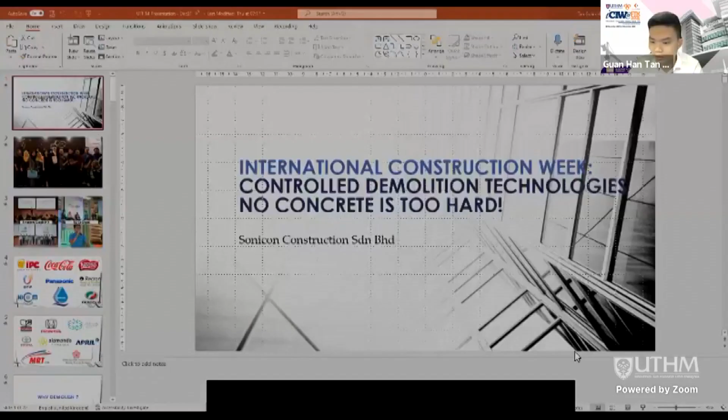Okay, mainly, this week we have International Construction Week, and my topic today will be controlled demolition technologies.

Okay, just a very quick introduction on who is Sonicon. So basically, Sonicon is actually doing concrete cutting, controlled demolition, robotic demolition. Basically, if I were to categorize in 2 words, it's basically controlled demolition.

Okay, so this is our company. We received an award 2 years ago, E50 by Deloitte and SME Corp.

And these are some of the events that we were invited to previously, to Google in Singapore, to KL Go Digital, and many more events. These are some of the projects that we have participated in before: IPC, Coca-Cola, Nestle, Perodua, UMW, HICOM, Honda. We even went to Indonesia, April Group, to do some work over there during their factory upgrade.

Okay, now let's come to the most important question in the topic. Why do we need to demolish in the first place? Takkan suka-suka just robokan saja, betul tak? Okay, so why demolish in the first place?

Picasso said this: every act of creation is first an act of destruction. So basically, to construct something, a lot of times you need to destruct something first, then only you can start building something.

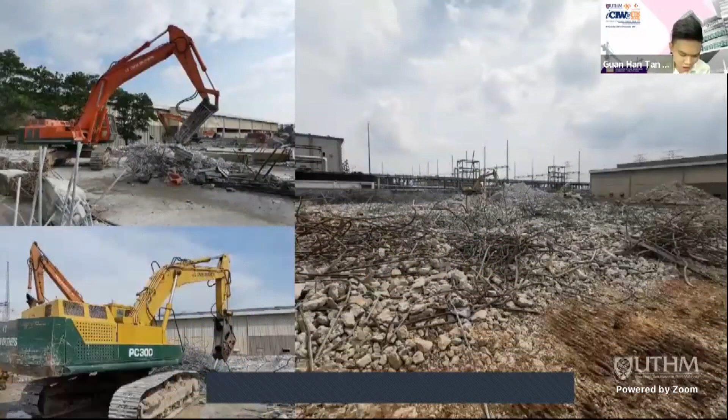So today my approach is a bit different. I'm going to share more about some of the cases or some of the jobs that we have done, to help you understand when all this demolition comes in, and also what kind of technology to use in different kinds of situations.

So this is one example of total demolition. We use big equipment, big excavators, high reach excavators, and we demolish the whole area. So this is actually one of the jobs that we did within the factory for power plant construction.

Okay, now I'm going to talk about controlled demolition, and I'm going to start out with non-vibration controlled demolition method. Okay, let's talk about the first case study.

This is IPC shopping mall. IPC shopping mall is basically next to IKEA, in Damansara, KL. Beside IKEA, there's a shopping mall called IPC. So IKEA and IPC are actually under the same group. In 2017, they wanted to upgrade the shopping mall, but the shopping mall still needed to operate other businesses.

So they cannot close the whole shopping mall just to cater for the renovation. So what they do, they have to shut down a portion, and the other tenants are running on 2 levels. This means our demolition method has to be quiet enough so that their business will be less disrupted. I won't say totally won't be disrupted, because it's impossible.

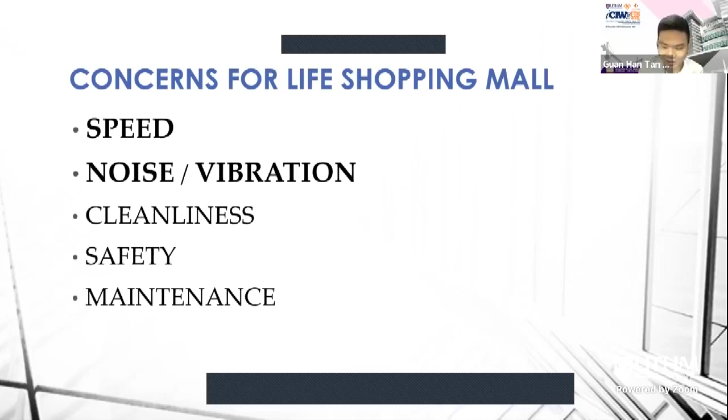So I talked about one of the things, we actually did quite a lot of things in Ikano. I'm just going to pick one of them to help you understand. Now they want to change the internal structure of the whole building. They want to install an escalator on a few levels, which means the previous escalator they will take out, and then install it in new areas. So let's say they want to install new escalators at this particular area.

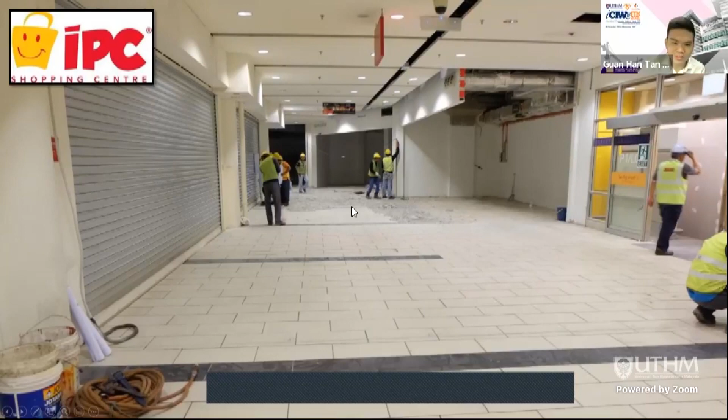Means I need to remove this slab. Okay, I need to remove this slab. So I want you to remember these 2 columns first, so that we have a reference later.

So when we start doing the cutting, only then we realize this is a 600 mm thick concrete, which is 2 feet thick. Most of the time in your studies, when you talk about slabs and all that, you're looking at maybe a normal slab, around 150 mm thick to 200 mm thick, 2 layers of reinforcement. But this one that we are cutting is 600 mm thick, which is 3 to 4 times more than the usual standard.

This is a precast panel. Again, this is a shopping mall, we are not allowed to hack, we are not allowed to make so much noise. So what do we do? We use diamond wire cutting technology.

You can see this whole thing is during the process of cutting. When we cut, we basically cut it 1 piece by 1 piece, like cutting tofu. One piece, square, take it out. Cut one piece, square, take it out. So it keeps cutting and taking out 1 piece by 1 piece. This actually makes the whole thing more efficient because I don't need to handle so much debris. Internally it's difficult for me to move in any bobcat or use labor to remove the debris, so I can move all these things piece by piece going out.

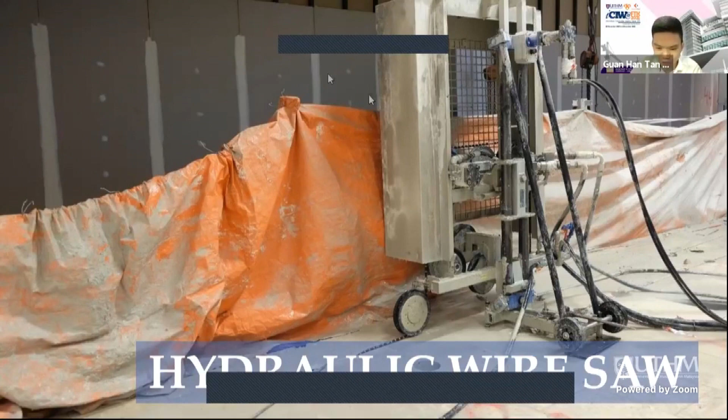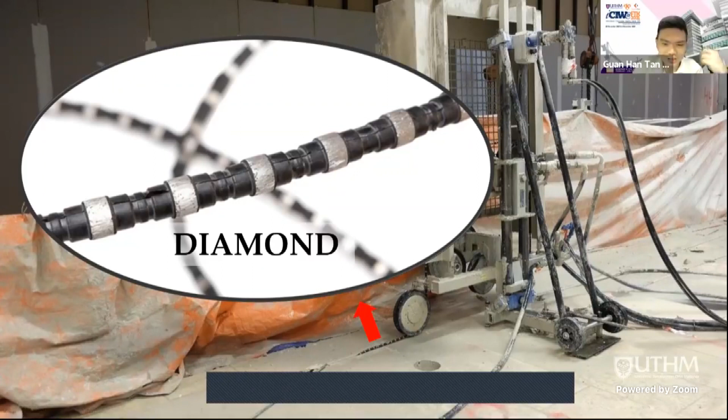This is how the hydraulic wire saw looks like. Look at this wire, we call this a diamond wire. In other words, all these cutting tools that we use, sometimes you hear people use diamond cutting tools to cut concrete. Why use diamond? Because diamond is the hardest material in the world.

If you go by the Mohs scale, this is grade 10. Concrete is around 3 to 7, asphalt is around 2 or 3. So diamond is much harder. So if you want to cut concrete, you want to cut rebar, it's not a big issue. So we're going to use diamond to do the cutting, imagine basically circling around the concrete and doing the cutting.

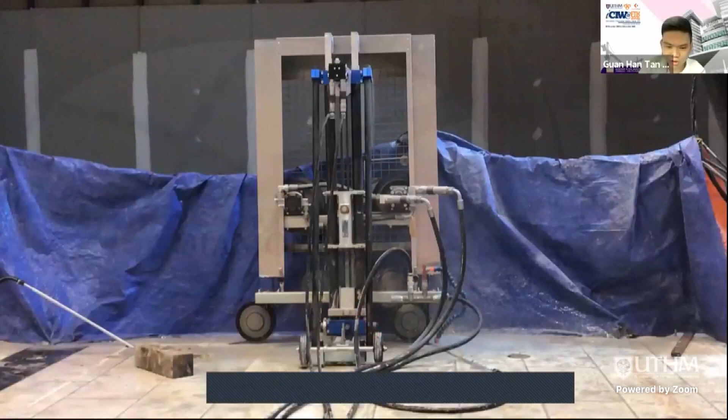Let me show you a short video regarding this.

Meaning, Mr. Tan, diamond cutting is the silent one. Yeah, this is actually more silent. Correct, in terms of noise decibel level, I think this is less than 90 decibels. Just to have an idea, us talking is around 70 decibels, 60 to 70 decibels. Cutting a tree using a chainsaw, when you pull it, it's like that. The one we're looking at is around 100 decibels, 90 to 100 decibels. So you have an idea what kind of noise range we are looking at. Among so many cutting methods, diamond wire is actually the quietest.

Alright, so you can see this is the 'tofu' piece that we take out, one piece at a time, and then we ship it out, move it here, ready to be cleared away. So you remember the 2 columns that I talked about? This is the 2 columns, and the whole area here, we cut and remove piece by piece.

The above level was also done by us, for the same purpose. They're going to build an escalator after that.

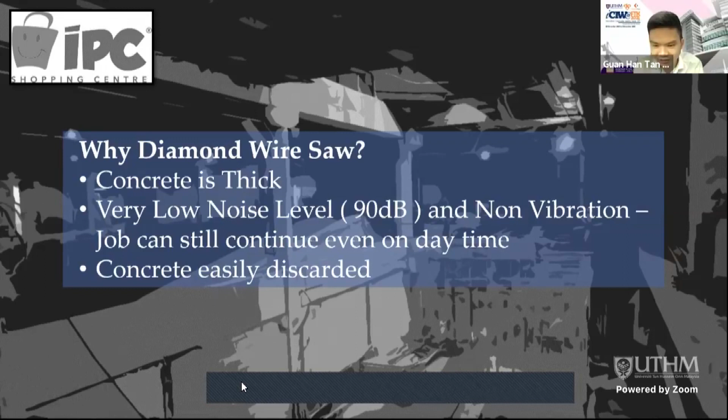So this is the first case of the shopping mall. This is before, this is after. You can see the difference.

Now we move to case 2, industrial factory upgrade. We do a lot of this type of job when it comes to factories. Just now we talked about shopping mall, commercial. Now we talk about industrial factory. What do they want to do?

They want to install new machines, new equipment, but they realize the slab was previously not designed to install new machines, because the machine load is too heavy, too heavy. So if they install the new machine without upgrading the structure or foundation, the whole slab is going to crack in the future.

So we have to remove the slab, but they have another concern, because their other production line is still running. This is actually an airplane parts manufacturing factory in Penang, and their production line is still running.

So we cannot allow too much vibration, because if we hack away the slab and the whole place is shaking, their production line with their calibration gun would all run away. So vibration is their biggest concern. That's number one. Of course, we also consider cleanliness, speed, safety, and maintenance.

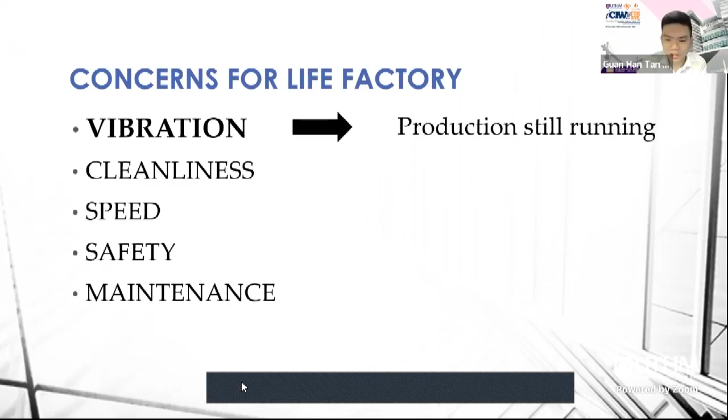Let me show you how the cutting looks like. This is a floor saw machine, a floor cutting machine, around 1 ton in weight. And here you can see this is the diamond blade.

Let me show you the video. You can see it's actually the same concept as before. We cut piece by piece, and then lift up piece by piece as well. For this slab, we were cutting at 400mm depth.

You can see that using diamond cutting with the right equipment, the effort can be quite effortless. Now I want you to notice something - once we do the cut, you can see the slab starts sinking down. See that? It's sinking because it's already cut through, so it sinks down to the soil and sits on it.

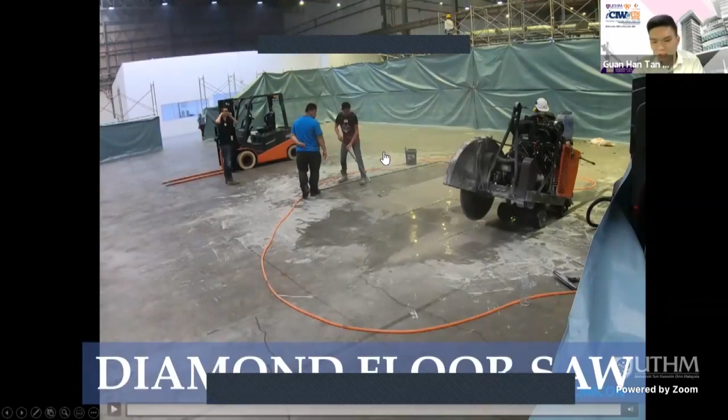After we cut all these pieces, we use a forklift to lift the stone out, lift the stone out, lift the stone out. So this is the diamond floor saw.

When we were doing this job, the owner of the factory was practically standing right beside our cutting area. He wanted to feel what kind of vibration we have when doing this job. Needless to say, when we finished the whole job, the vibration was minimal, even close to zero. There was no vibration - it didn't affect their factory or their production line.

Now this is the infrastructure work. Just now we covered commercial, then factory. Both of the previous jobs we mentioned were more of an upgrading job.

Do you remember the 3 reasons we talked about? One is refurbishment, one is upgrading, and the third one is rectification. I'm sorry, let me get that right - so now we talk about rectification.

Rectification means something screwed up, something went wrong. A mistake was already made, no choice - they have to rectify it. They need to repair the issue.

This one, I feel, may be our most challenging job over my years of experience in this line. Look at this thing - this is the support for a highway that is going to be built. Look at the top here - you can see it looks like it's already bent.

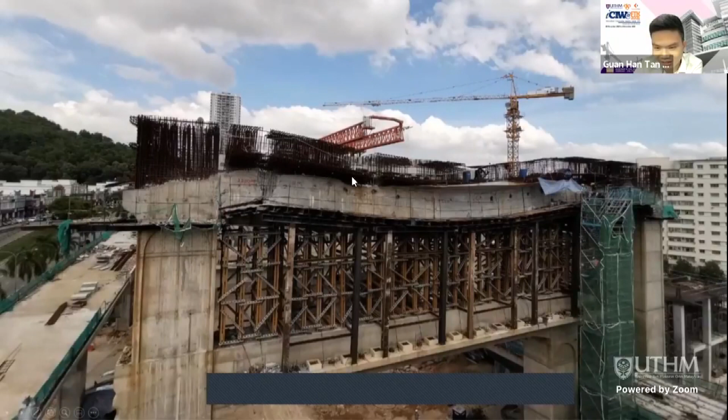So this is from the top view, you can see this thing starts sinking down. Can you see, doctor? Yes, oh yeah, it actually sinks down already.

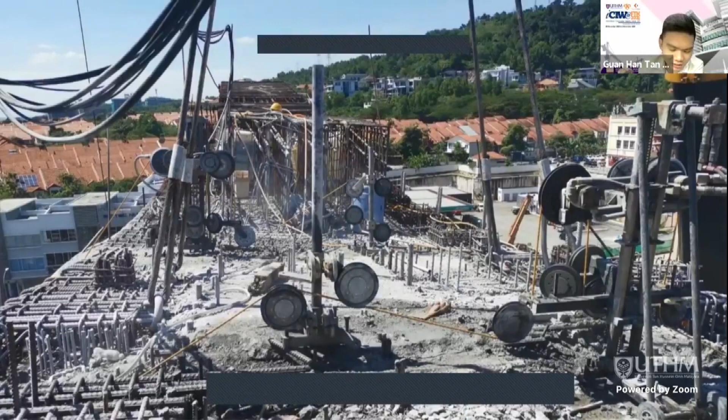So we use the same method again, diamond wire, same as what we showed as the first one. When we were cutting this, the width is 2.5 meters, the height is also 2.5 meters. In other words, we are cutting a 2.5 meter depth, even taller than all of us here.

The good thing about using diamond wire is that we are not limited to any kind of thickness or size, so we can practically cut as big as possible. But when it comes to cutting or removing, one of the biggest concerns is how we are going to throw away the concrete. A lot of times the cutting part is the easy part. To dispose of that concrete, that is the challenging part.

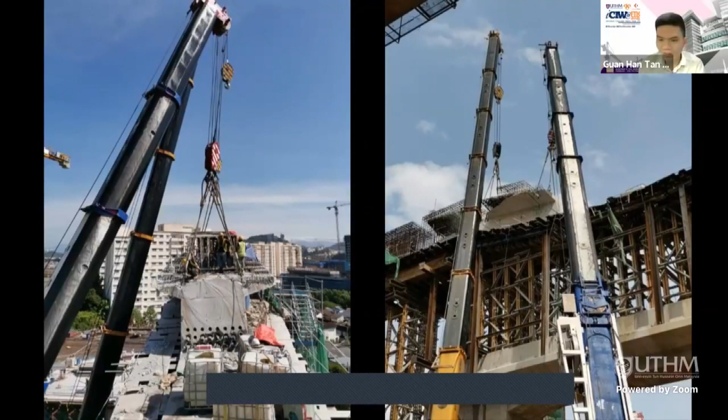So here we use two cranes of 500 ton each to carry the pieces. One piece of this is 200 ton of concrete. The whole portal beam that we removed was 800 ton.

You see, after we bring it down, you can see all our operators standing right in front. You can see that the portal beam is very tall, 2.5 meters is very big. Let me show you the video of us doing a little bit of this cutting.

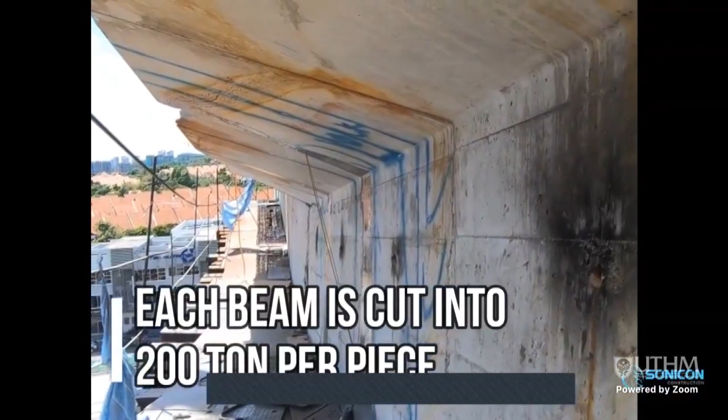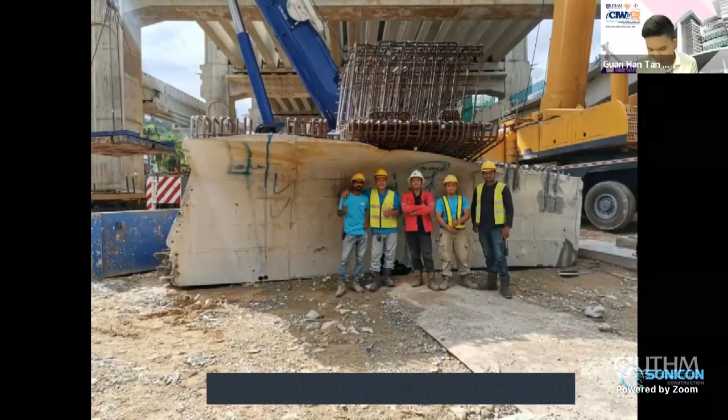Any question until now?

Okay, let's talk about outdoor and indoor demolition. Outdoor, because the place is big, the sky is the limit. You have very big space and all that, so we can use excavators, we can use high reach, which Mr. Low is going to share later. But when it comes to indoor, size of the equipment becomes a big issue.

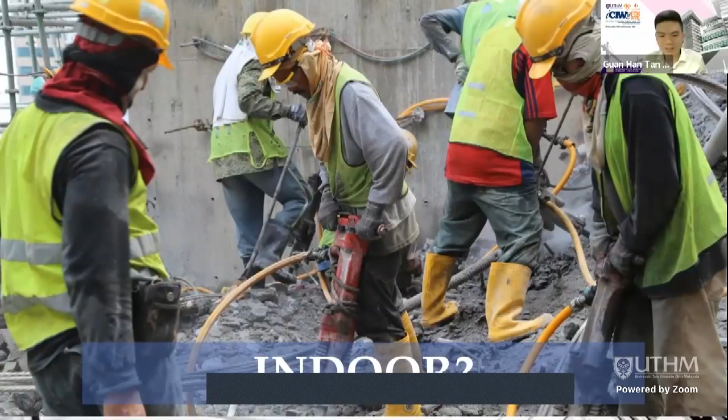There are a lot of times when it comes to indoor, what do we do? We use human labor, we start using people to do the hacking. But as always, we've been seeing a trend where we want to cut down on foreign workers, we want to use more technologically advanced equipment. So how do we curb this issue? Because when it comes to hacking, there is going to be a lot of manpower usage and reliance on foreign workers.

So how do we save more than 20 manpower?

This one is a very small job, but it's a very interesting job for me. We are going to demolish a strong room. Let's talk about this case.

This is a jewelry store in KL. They want to upgrade their shopping mall, upgrade their shop, and remove their strong room. A strong room is basically a room to store all their gold bars, jewelry, expensive items. So you can imagine the structure, they are definitely not going to use brick wall, they're going to use very heavily reinforced concrete.

One thing's for sure, it's going to be very difficult, it's going to be very hard. So this main contractor, when he quoted the job, he...

He just said, never mind, use manpower to go and hack it. Then after they hacked a bit, they realized it couldn't be done that way. Because of this, they have to hand over to the client in 3 days time, and he doesn't have sufficient time to do the work. So last minute, he called us at 10 o'clock at night and asked us please help, please come and do the work.

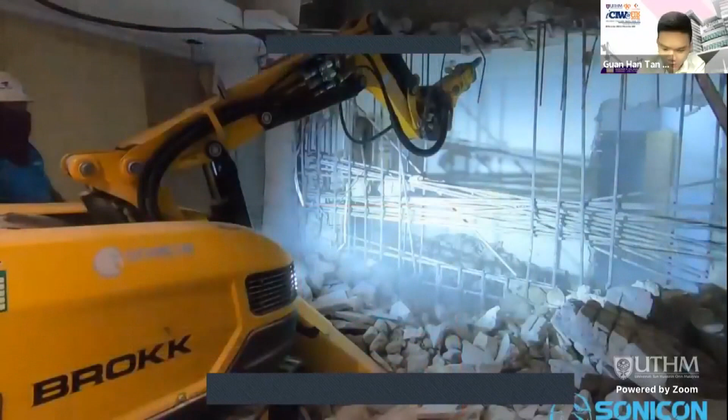Now you can see, my access is only from here, the front door. A lot of times when you see this kind of limitation, the choice that we have becomes very limited. The machine has to be very small and very powerful to meet that kind of schedule. So in the end, we used a robotic demolition machine to enter this place. Let me show you this video.

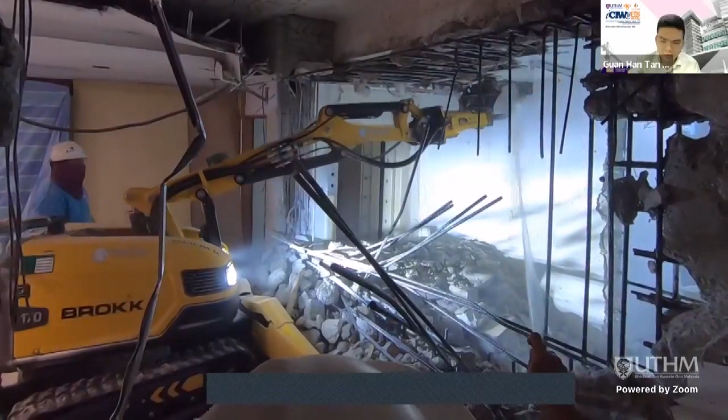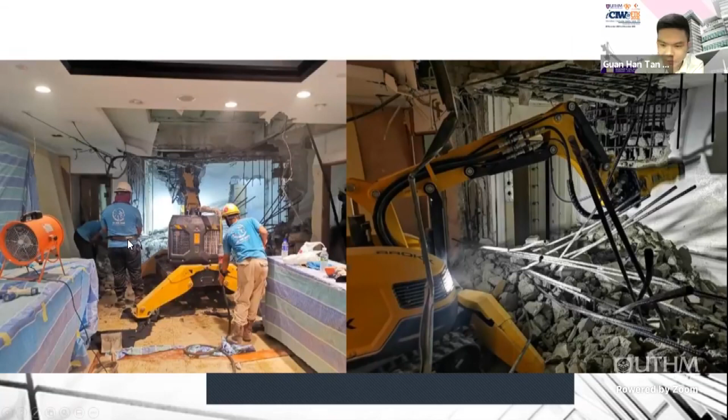So how do we control the machine? You can see this guy right here, he's basically using a remote control to control it. It's like playing PS4 or PS5 to control the equipment. So this guy is controlling the robot from here, he doesn't need to sit on it. That's why the robot is actually shorter than the man. When the robot is shorter than the man, it means they can access a lot of confined areas, including indoors. You can see from the first picture, the door is only that size, and the robot can enter easily.

So why robotic demolition? This whole thing, we completed in 1 day. This is such a small space, we definitely cannot fit 20 men inside. We can have 20 men chase the work, but they cannot fit in that much space. So you need something that is very fast. So robotic demolition was the solution to this job.

Let's talk about case study 5. There's one term I would like to introduce to you, called soft demolition. Just now what we mentioned, first in the shopping mall, the jewelry store, the factory, or removing the big beam - all these you can call hard demolition. You remove structures and all that. But let's talk about soft demolition.

Soft demolition means we remove the bricks, dismantle the fit outs, remove the partition, remove the flooring, tiles, covering and all that. In a way this is also done in a controlled manner. But we want to combine equipment into soft demolition, because all this while soft demolition we are using men to do the work. How do you open tiles? Use people to hack it. How do you open a partition? Use people to open it. How do you hack down a wall? Use people to hammer it. So we want to change a certain approach to the market.

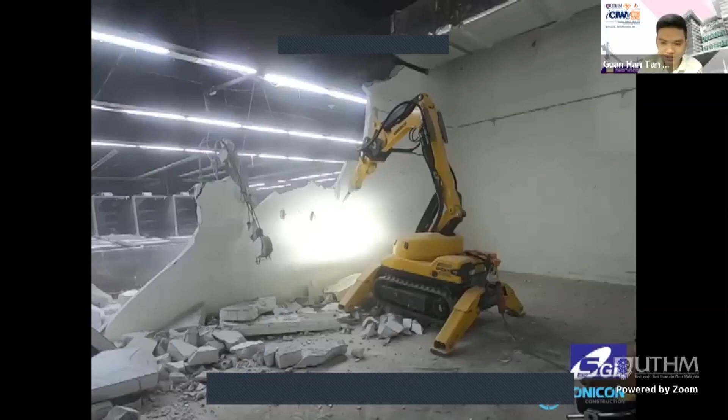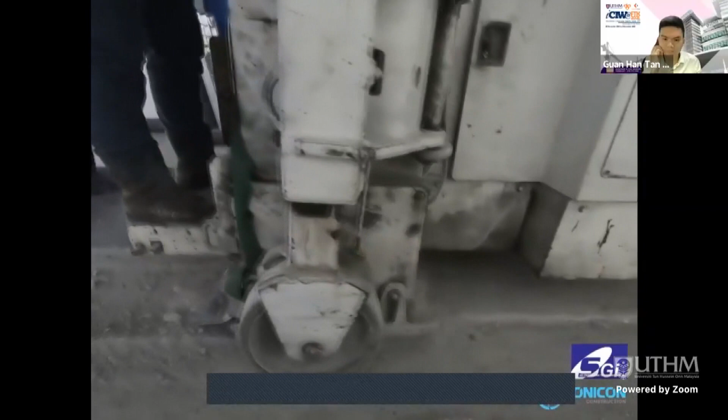So you can see here, when it comes to hacking the wall, we use a robot to do the work. When it comes to removing tiles, removing mosaic, removing vinyl, or other kinds of flooring, we use different equipment to scrape it out, which is so much more productive.

Now I'm going to share the last one, which I believe a lot of you may or may not have heard about. How do you remove concrete but retain the rebar? Just now we did the cutting for the highway, we talked about removing the slab, cutting for the factory, or even hacking for the strong room. All the metal either gets damaged or gets cut away, correct? But how do we remove just the concrete while retaining the rebar?

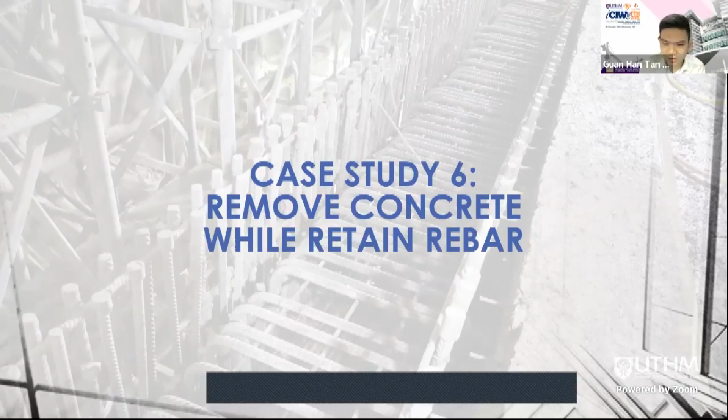Let me introduce to you - this is before the job we're going to do. This is a 1 meter width by 1 meter thick beam, for a tunneling project. What they want to do is strengthen the existing structure because there's a change of design - they want to strengthen the existing beam so it becomes strong enough to support incoming traffic. So they have to remove the concrete and then enhance the strengthening from the rebar. But hacking won't work, cutting won't work.

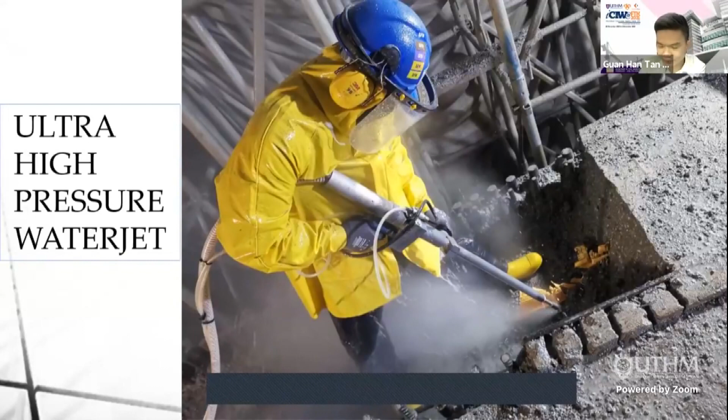How do you do it? I want to introduce to you the ultra high pressure water jet - basically using water to hack away the concrete. Because by using water, we will not damage the rebar. However, the water pressure is strong enough to remove the concrete piece by piece.

I just want to give you an idea of how strong or how high the pressure is. You know washing a car, we have this water jet, the yellow color one, for washing cars - in terms of PSI, the pressure is 1000 PSI for washing cars. Here we are looking at 30,000 PSI. In other words, the pressure that you use for washing a car, this is 30 times stronger.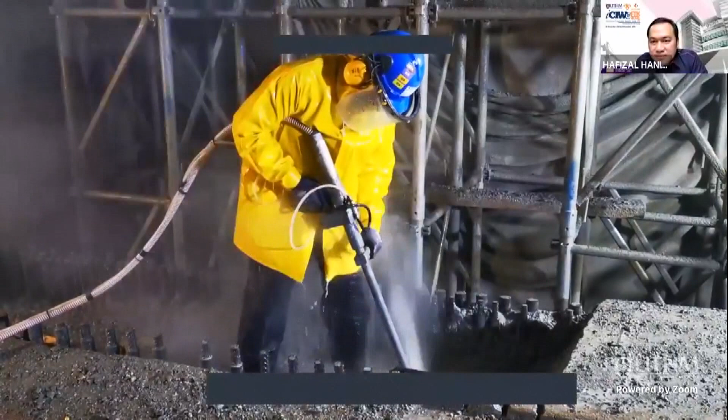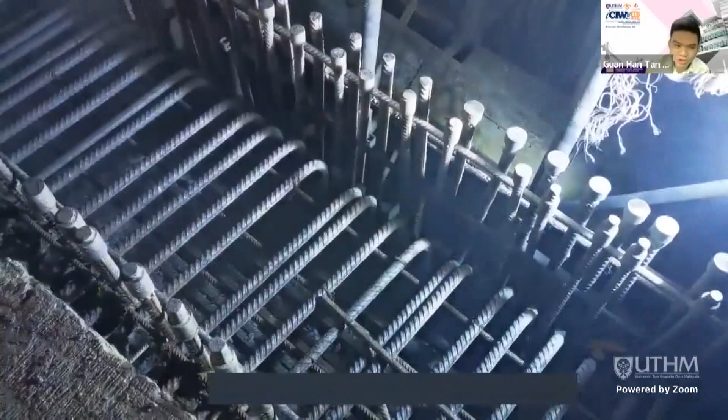So you can see this rebar, externally we have removed, and then we are shooting in the middle now. Okay, this is after washing. You can see that all the rebar is exposed. All the concrete is removed, and the rebar is intact.

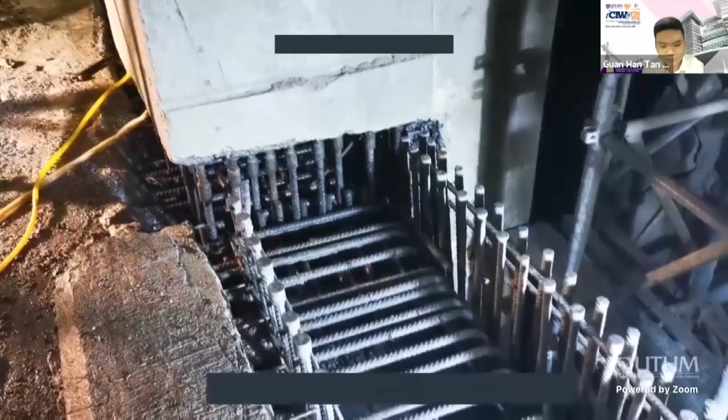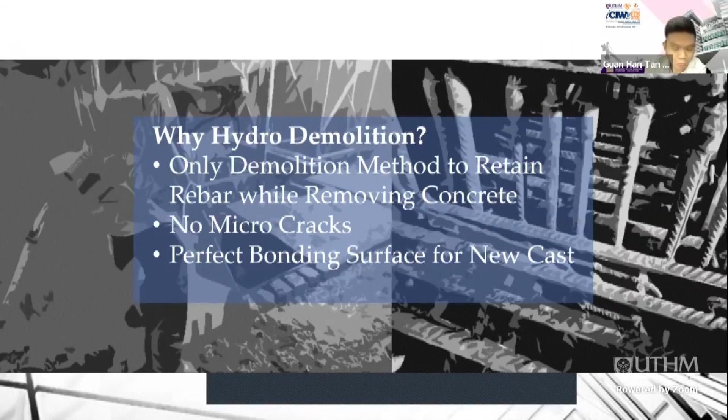So again, why hydro demolition? This is the only demolition method to retain the integrity of rebar while removing all the concrete. There will be no micro cracks. Next time, after they upgrade and want to enhance the strength, they're going to do a new cast of concrete. It's going to have a perfect bonding surface for the new cast, so when they pour a new layer of concrete, it's going to stick to it very nicely.

Okay, so I come to the end of my presentation. I think there are a few questions that were addressed to me that have a similar theme. I just want to put this into light.

What do you need to consider before the demolition takes place? I think this is very important. Just now, what I showcased - we talked about diamond cutting, total excavator hacking, wire cutting, hydro demolition, robotic demolition. There are times we also have to use labor to do the hacking. So what are the things to consider? What kind of work is it - come back to the same question again.

Is it a refurbishment job? Is it an upgrading job? Is it rectification? Is it total demolition? What is the size? What is the design of the building? Or what is the size and thickness of the structure?

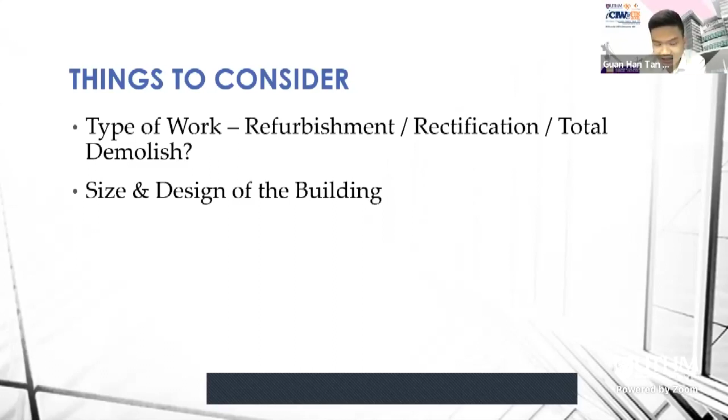Where is it located? Is there an existing tenant? Is it heavy traffic? Is it in the city center, or is it in a very remote place, one building in the middle only? Is it a residential project? Is it a shopping mall? Is it a hotel? Every building has a different concern to tackle.

We have to approach each job while studying the environmental factors. What is the building made of? Concrete - how thick is the concrete? What is the reinforcement?

Timing - what time can I work? Is it at night time or daytime? Is it only 2 hours of work? Is it only 5 hours of work? Or am I only given a 1 month schedule to do the work? What is the timing we are looking at?

And most importantly, how are we going to handle the debris? It's not just a matter of saying, oh I cut and hack, then leave it as it is - I need to throw it away. So this is a very big concern. Sometimes we can move the machine inside, but we cannot bring out the concrete. How do we handle that? So these are the things to consider for what kind of approach to take for the job.

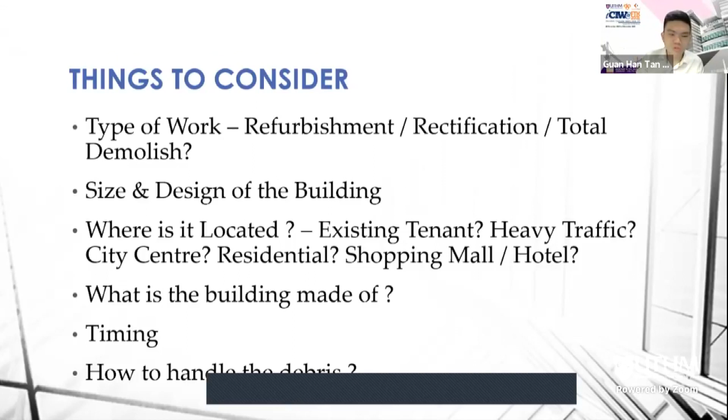So what I can say is there is no one solution or one method that is the best - this one thing can do all 100 things in the world. It's impossible. Again, it's impossible.

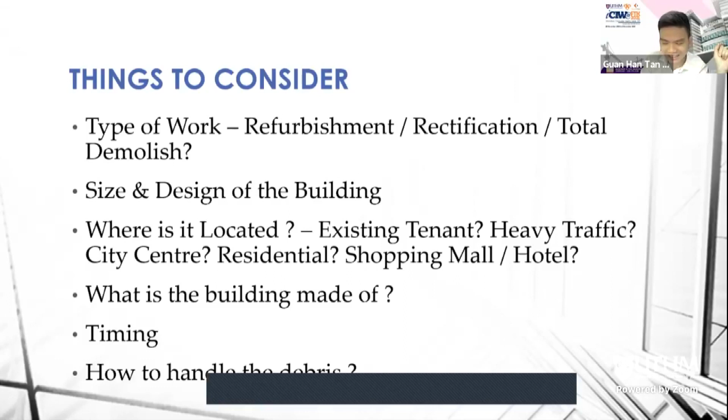We have to choose what is the best approach for each job. And most importantly, the reality of the case - a reality in the world. Most importantly, budget - how much money is available for this project?

Sometimes we have even very special requests to do a job at a very cheap price, because they have no budget. Sometimes we have to turn down the job because it doesn't make sense. So if the budget is not enough, then certain compromises have to happen.

So budget actually plays a very important role. If the client has more budget, then there are more things that can be taken care of - environmental factors, existing building structure, the timing, the schedule. So these are the important things.

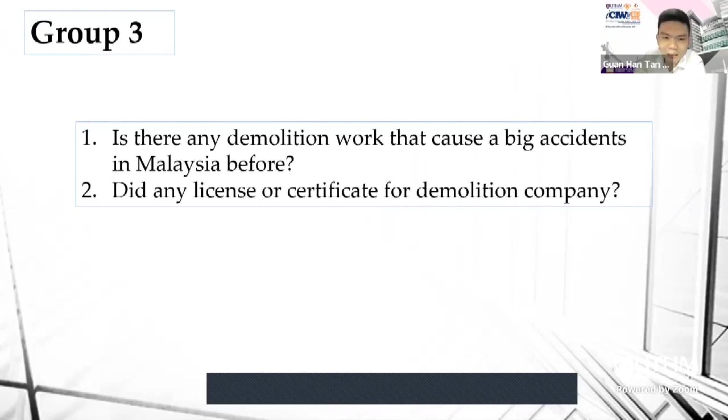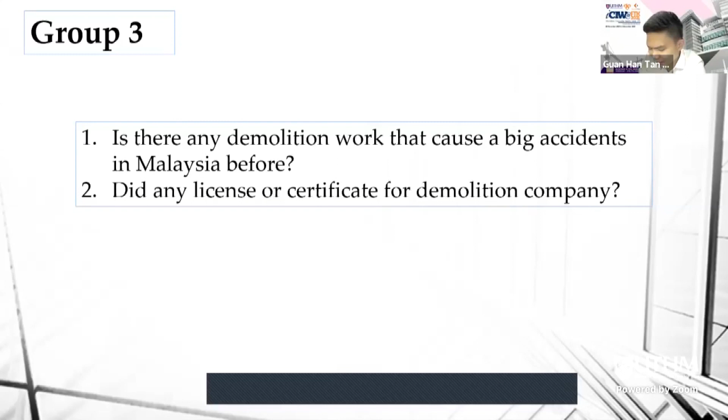Number 2, any license and certificate? CIDB lah—Construction Industry Development Board. We have to apply under the demolition license. But if you want something even more professional, I think other countries have certain special certifications. Like for controlled demolition, there is cutting, there is an association called CSDA, Concrete Sawing and Drilling Association, that one is in America. So if we want to send our operator there to be trained and certified, these are some of the things that can be done. But I believe there are many specific sectors on what kind of certificate we are looking at.

Sometimes, if that thing is not demolished, it's actually bad for the environment. If that building has been abandoned for 10 years, 20 years, it's a sore sight, nobody maintains it. You leave the building there, it's actually worse. So for demolition, how are you going to control it? There will still be a few things that won't run smoothly—there will be debris, there will be dust, all that. But this is how we handle all these things tactfully to maintain the environmental issues.

For me, one of my biggest issues is always how to handle the debris—how are we going to bring out the debris? Usually, to do the cutting and all that, I think there's always a solution, either using a different method or different technology to do the work.

Also, I think one of the biggest hurdles we have is the budget from the client. They want cheap, they want nice, they want fast, but no budget. Sometimes we cannot do it. So these are the problems we sometimes have to face. But generally, there's always a way out—with enough planning and enough resources, usually we can cultivate the demolition works.

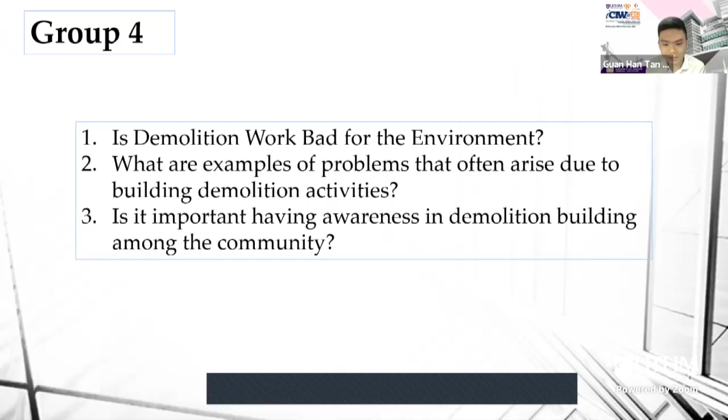So just now I saw one question from the chat group: is there any limit on the maximum concrete strength that limits the capability of the method you explained just now?

If you talk about supporting the weight of the machine, then yes. It's not so much about removing the concrete - if removing concrete, the weaker it is, the easier my job. But if you ask what kind of concrete strength is needed to support the equipment, then yes, it depends, because each machine has its own weight. Some may be less than 200kg, 300kg, those can access everywhere, less than 1 ton. But those that are 5 ton, 10 ton, 20 ton, then there are more considerations we have to look at. I hope this answers your question, Andre.

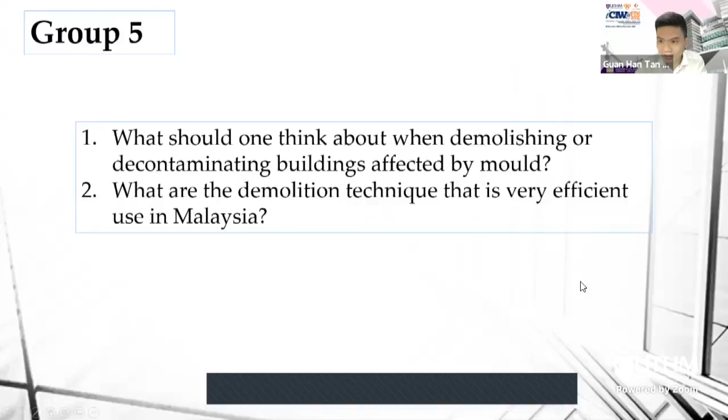Okay wait, let me share back, let me see if I have the photo. Okay, look at this photo.

From the top of the photo, we are attaching it to a manual chain hoist, 3-ton manual chain hoist, two of them. So at the top we have a chain hoist, chain block. Using the chain block, then we pull, and this whole thing comes out. We cycle it with a belt, a yellow belt, then we move it up. Sometimes we use tendon, or more commonly known as a sling, but sometimes we use a belt to pull. In fact, a lot of times cutting to me is not a problem - removing the concrete, that is the biggest challenge.

You can see down there, when we were doing this we actually set up the props ready so that once we cut, it doesn't just go straight down. It has something at the bottom - temporary support, right? Correct, temporary support. That's where I got the idea.

Hold on, my mouse suddenly has no battery. Alamak, I can't. Can you address the question that was asked? I saw there's a chat but I cannot click it. Okay, the second one, I will help Mr. Tan address the question just now.

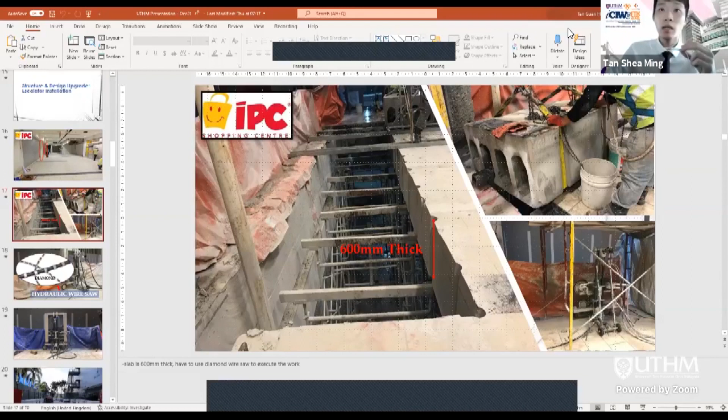Dr. Andre asked: hi Mr. Tan, just now I'm referring to ultra high strength concrete over 100 MPa - can the diamond cutter or the water jet cut it? Okay, yes it can be cut, but fast or slow only. I don't say that we have cut more than 100, but we definitely did grade 90 before. It's definitely more difficult, but if you ask me can or cannot, we can. But higher budget, slower work.

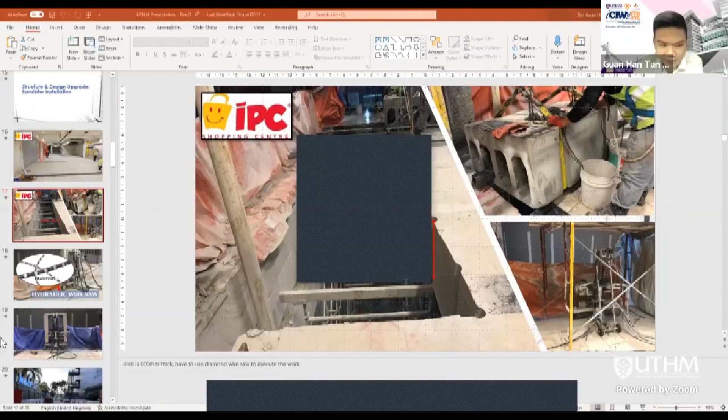So even when it comes to diamond cutters, this diamond also has a lot of types. It's not just one type that can do everything. When it comes to diamond technology, we have hard bond, middle bond, soft bond, very soft bond, American diamond, South Africa diamond, China diamond, many different kinds of diamond. So we have to customize the right tools for the right job.

Using water jet to hack away 100, I never tried that before. The maximum I did was 60, and I already find that a bit difficult. So whether we can do it or not, we have to set up certain parameters and use equipment.

We need more water and higher pressure to do the job. So just now when you saw a human shoot it, right? This one cannot use a human to shoot, we need to set up a machine to do that.

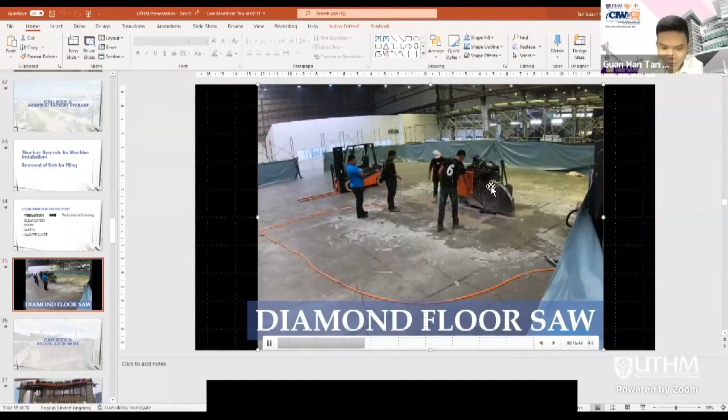Okay, I just shared back my video just now. If you look closely, you can see I use water. So actually during my diamond cutting process, water is basically a must. The intention is actually to cool down the blade, or to cool down the wire, because diamond is most afraid of what? Diamond is most afraid of heat. If it's too hot, the effectiveness and the lifespan will all be reduced. So we use water. So you are right, while we are using water, the dust can already be suppressed.

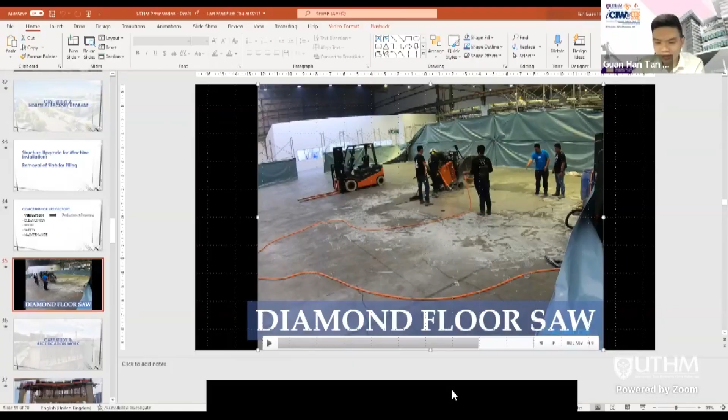Okay, understand, like water jet and all that. Okay, let me give you an idea of what the cost is like. If you talk about cheapest and fastest, excavators and hydraulic breakers are definitely going to be much cheaper than diamond cutting, much cheaper.

So let me give you an idea. Excavator should be the cheapest. Second, maybe robotic, I don't know. Okay, third will be diamond cutting. Hydro already, all right, it's over the roof already. So robotic needs a lot of maintenance, right? Yeah, you're right, the maintenance. The robot that I showed you just now costs around 700,000 to 800,000.

That's a small robot. Ask Mr. Low, with 700,000 to 800,000, how big a machine can you buy already? A PC 300 still got change lagi, correct? My 2-ton machine is equivalent to his 30-ton machine. Yeah, a 30-ton excavator can buy already. 30 ton, how strong it is, and we are only 2 ton. So that is because of the equipment investment and price range, and also the productivity and the speed.

Mr. Tan, can you please touch a bit about chemical demolition, using solvent and using chemical? Did you have any experience? I have, but I think Low has more experience in this area.

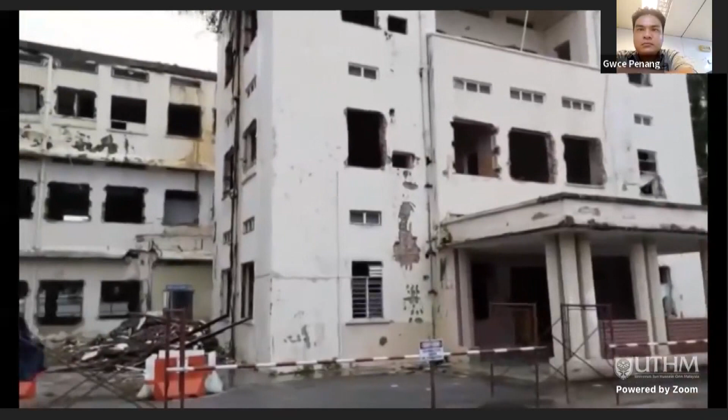Okay, let's follow me, go inside the site. So okay guys, this is the building that we are going to demolish. Well, this is just a part of it. Actually there's still another side. There's but we already demolished it. Later I will show you.

Okay, so basically this case is like this. This building was constructed since 1940, so it's already about 80 years ago. This building was actually constructed during World War II, built by the British I think, as a hospital.

So this hospital Bersalin is already shut down because they found out that the structure is not stable, not suitable to continue using anymore. So now they are asking us to demolish and tear down the building, and then they will rebuild a more advanced and better hospital Bersalin. This project is under JKR, built for KKM. Basically the case is like this.

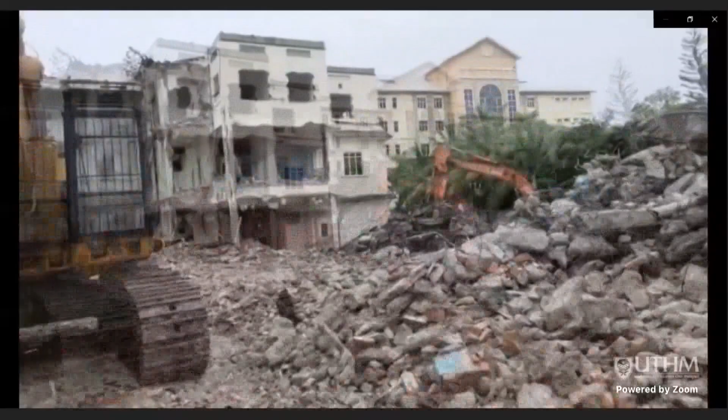So this is our high reach demolition excavator. As you can see, this is the concrete crusher, which we call the primary concrete crusher. The step is they use this concrete crusher to crush the whole building structure, and when they tear it down, another excavator will go pick it out to remove it to another side. Then another excavator with a secondary concrete crusher will crush the structure and remove the rebar and concrete. The rebar we will salvage, and the concrete we will recycle on site and turn it into crusher run. Later I will show you how the progress goes.

So coming back to this machine, this one is actually imported from the UK because Malaysia didn't have any machine like this available, so we purposely imported it from the UK. As you can see, this machine is very big.

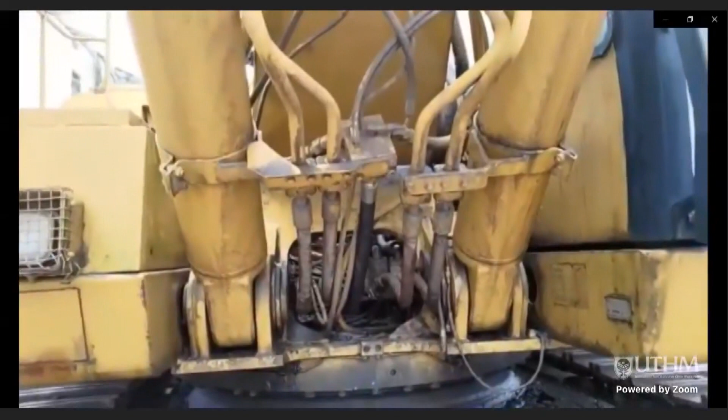Here's a very important thing I have to mention: this machine is original, built by a manufacturer, but some machines outside are modified locally, which means the safety equipment is not complete. As you can see, here there are many hydraulic hoses, and this is a safety valve.

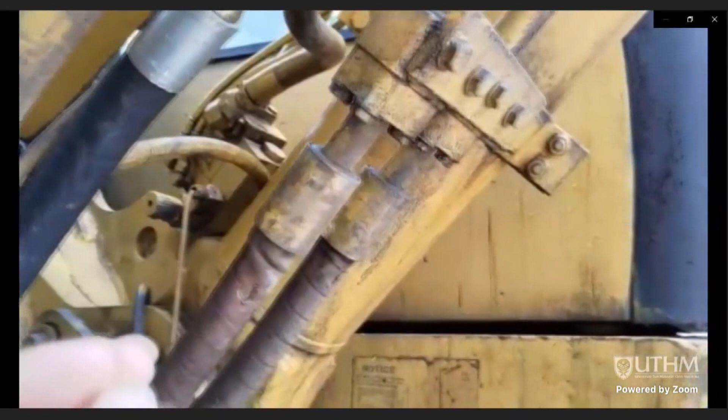So what is the function of it? Whenever the hose bursts, this safety valve locks it, so whenever the hydraulic hose bursts, the long arm like this won't fall down. Some demolition contractors buy a normal excavator and then modify it themselves, turning it into a long arm excavator. This is not a good practice.

But Malaysia doesn't have a law to enforce this part yet, so it's very dangerous. I know there was a case before where they used a normal excavator and locally modified it, and that caused an accident. That's why we purposely import from the UK—even though the price is very high and expensive, we still do that.

As you can see, at the back of the big excavator here, there's another excavator. This excavator has its own purpose, its own job. As you can see, this excavator has a normal bucket along with another thumb attachment here. What is the purpose of using this equipment?

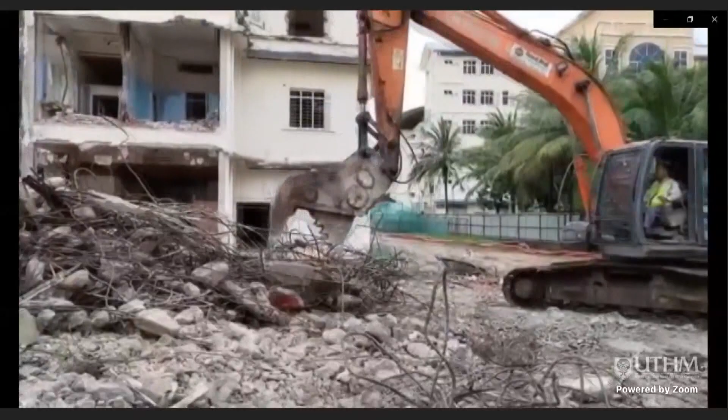This is another excavator here, attached with a secondary hydraulic crusher. Sometimes we call it a dinosaur because the attachment seems really like a T-Rex. The purpose of this unit is to crush the concrete and then salvage all the metal. We take the metal to recycle, and all the debris we will also recycle.

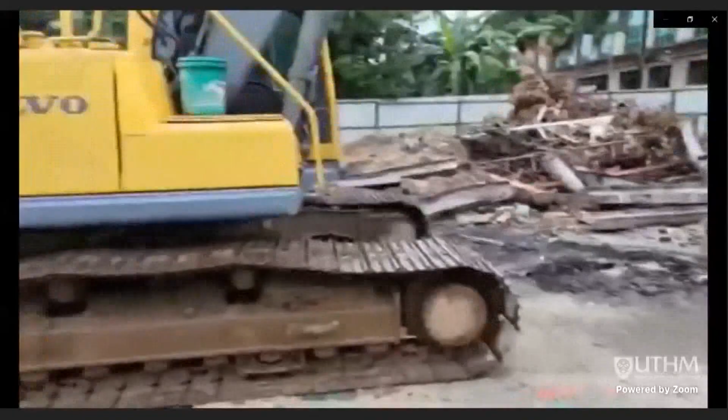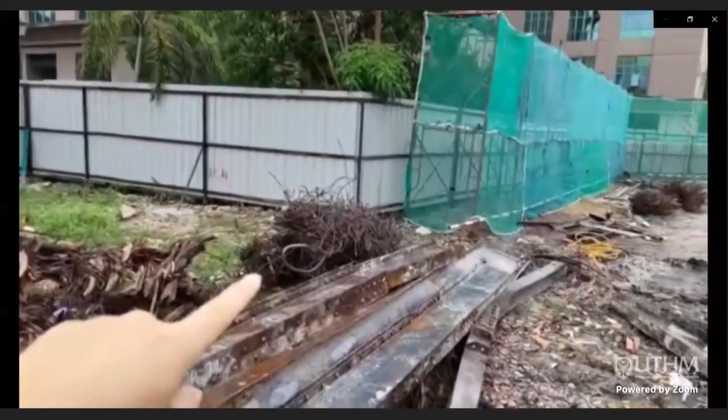After crushing it, we make it into a metal ball. So this is a product after the secondary crusher crushes it, and then we put it into our dustbin. Then we take it to salvage.

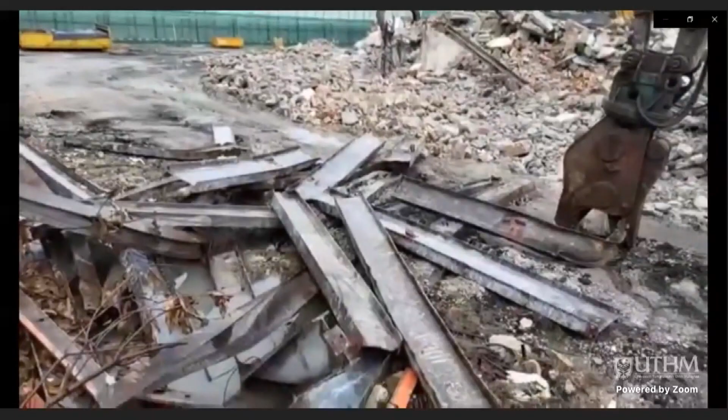This is another excavator here, attached with a hydraulic shear. The purpose of this hydraulic shear is to cut the I-beam. So all these I-beams have been cut into lesser than 20 feet, lesser than 6 meters, so that they can be put into the dustbin, the Ro-Ro from the Lorry.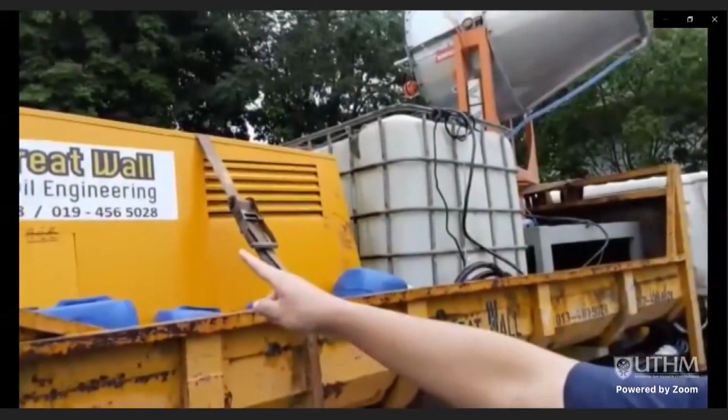This is a genset to supply the current to the dust cannon, and this is the water tank. We put it on the truck, on the lorry, so we can easily move it to the place we want to control the dust. Later I will add a video to show you how it supports us during the demolition work.

It's quite effective. We cannot say demolition work can 100% control all the dust - that is bullshit. But using this dust cannon, it has successfully reduced the dust down 70% and even up to 80%. So it's very effective, and the throw range is about 25 meters.

About 25 meters, but it depends on the wind. If the day is very windy and the wind is opposite from our dust cannon, the distance will be shortened. But if we throw accordingly in the same direction as the wind, it will go up to 40 meters.

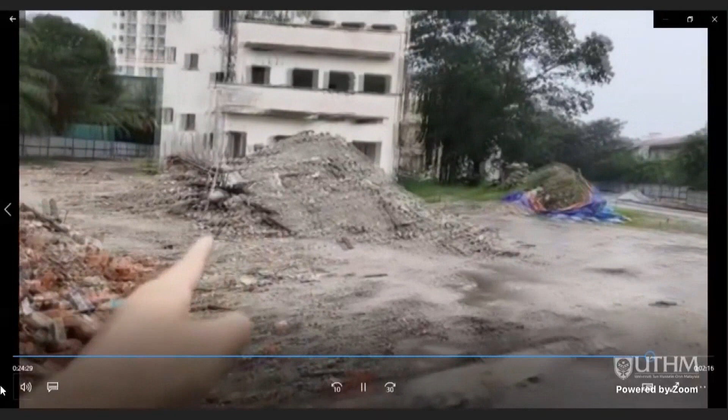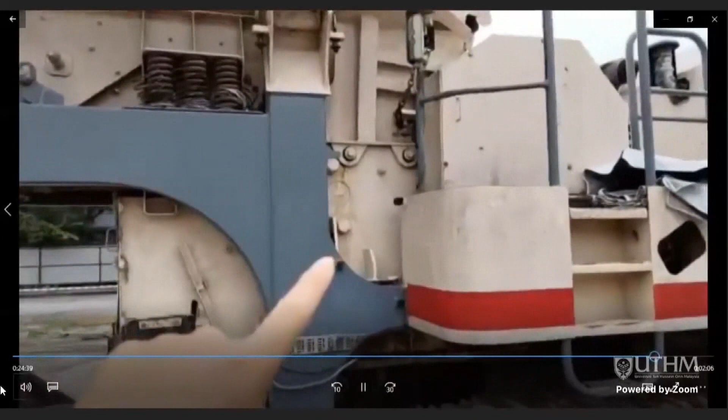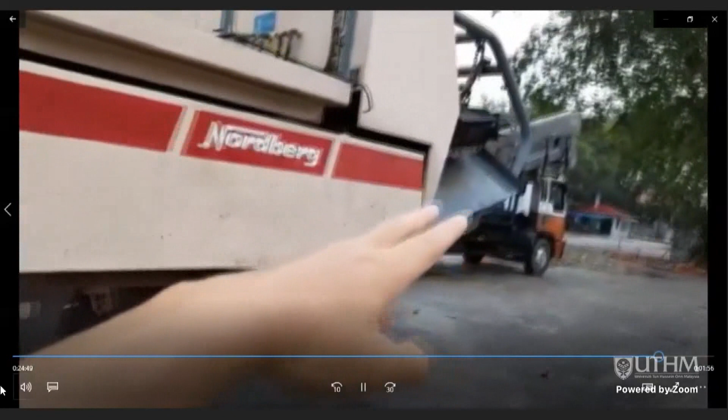We will use the excavator to load this and feed it into the feeder, then there's a crushing unit here. It will flow into the crushing unit and crush it, and then the conveyor belt will pull it out, and it will become crusher run. Crusher run size is below 50 mm.

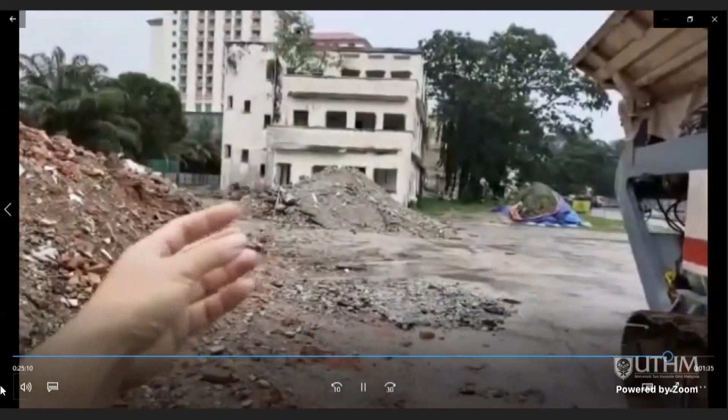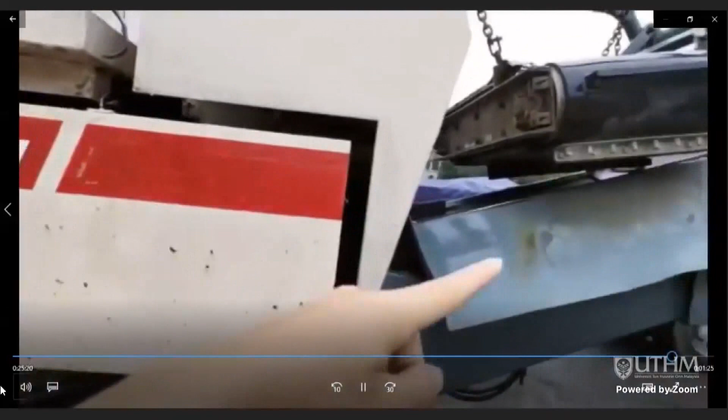So there's another conveyor belt here. This item is actually a magnet separator. When the concrete debris has some rebar inside, we put it in, crush it, recycle it, and when it comes out, the magnet will separate it. Later I will show you another video of how it progresses.

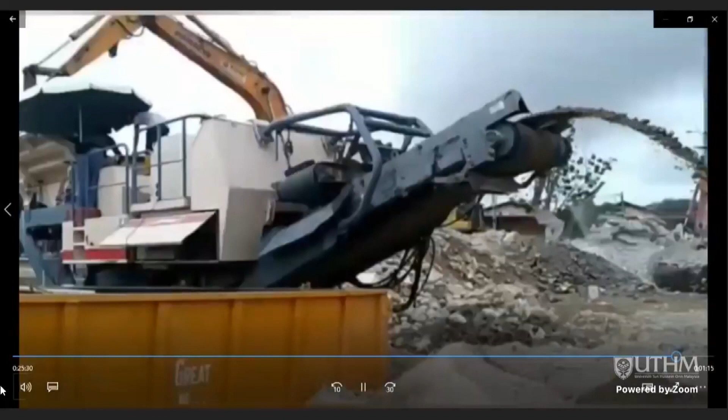Okay guys, so after we recycle all the debris and turn it into crusher run, we will put it back on the backfill and make it level on this side. After we level it and make the crusher run one layer, the pounding machine can move in and do their pounding work.